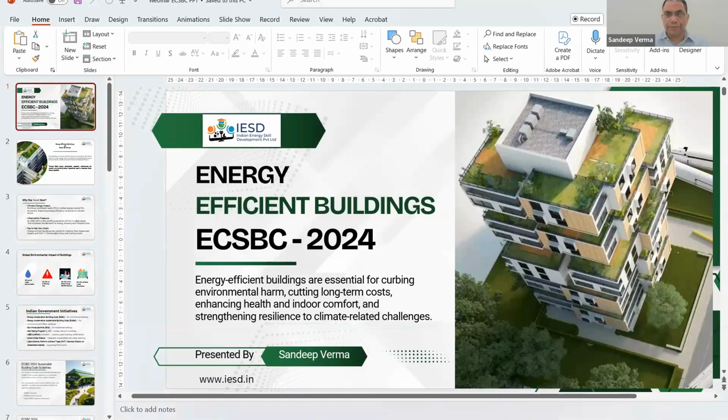So today we'll be briefly talking about Energy Conservation and Sustainable Building Code 2024. This topic is primarily focused on new buildings, which is coming for office spaces and for commercial usage. So first we have to understand what exactly is different in this code vis-a-vis the earlier version of Energy Conservation Building Code, be it 2007 or 2017.

So we used to categorize buildings in two segments. One segment was energy efficient building, another segment was green buildings. So at one side, we were talking about energy efficiency when it was coming down to energy efficient buildings. And on the other hand, we were talking about sustainable development through proper utilization of natural resources and local ecological systems. That was called green buildings. We had statutory guidelines for energy efficient building in the form of ECBC, but we were not having as such a statutory guideline for green building, though rating systems like LEED or GRIHA were present as a voluntary mechanism.

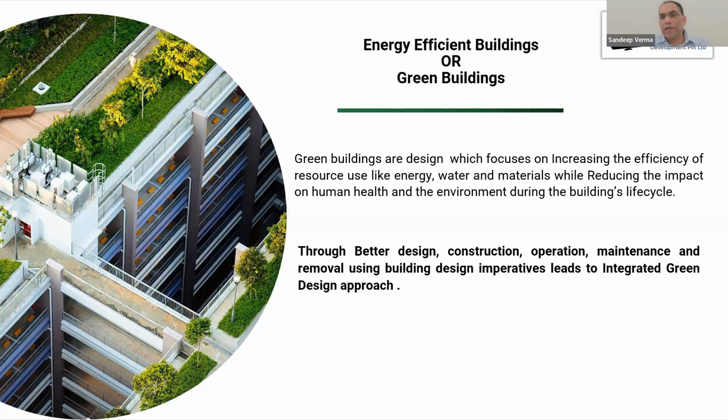So going forward, why do we need this now? That is the very pertinent question - why are we focusing on sustainability as well under statutory requirement beyond energy, because it is observed that 40% of global greenhouse gas emission is attributable to the building sector. So it is a very large chunk.

And then again, there is a huge shift as far as population is concerned. More and more population is moving towards urban areas from rural areas, and it is expected that by 2050, roughly 68% of the world population will be living in urban areas only. So it will put pressures. Obviously, all these people will be working and they will be using commercial spaces, and obviously they will be having residential needs also.

And then we have made a commitment at a global forum, mainly the Paris Agreement. Everybody has heard about it. So we have made a net zero commitment by 2070. So in order to meet that net zero commitment, and in order to ensure sustainable development, we have to adopt these kinds of practices in a very thorough manner so that we can mitigate our carbon footprints.

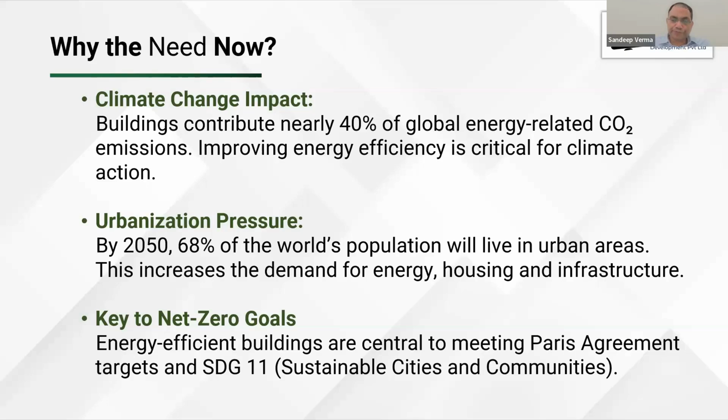So these are basically the global environmental impacts of buildings. Buildings basically consume roughly 20% of water consumption. They consume roughly 40% of energy use. Again, roughly 40% of greenhouse gas emissions, and around 30 to 40% of solid waste generation.

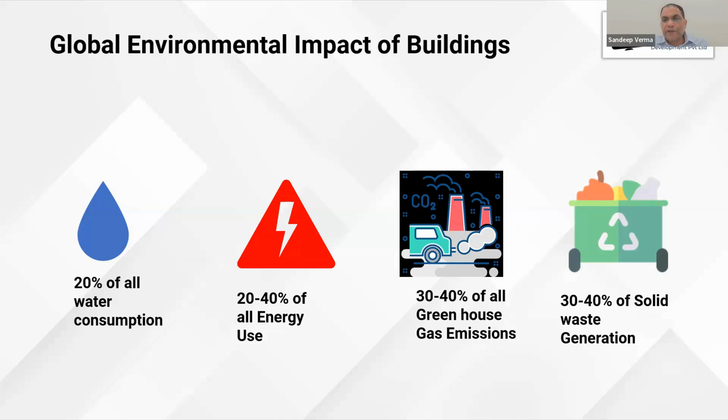So you can see that waste generation is another big factor which has to be considered when we are going forward with this code.

These are different initiatives which have been taken by the Indian government. The genesis lies with the Energy Conservation Act, which was constituted in 2001. Under that Energy Conservation Act, or EC Act 2001, different legislations have been formed, different guidelines have been framed to ensure proper efficiency along with occupant comfort.

These codes are namely the Energy Conservation Building Code, then the Energy Conservation and Sustainable Building Code. And then we have Eco-Niwas Samhita also, that is primarily meant for residential buildings. It was introduced in 2018, and subsequently some chapters were added in 2021. And now it has been further enhanced for higher level of compliance, and ENS 2024 is also available.

Though it is not statutory as of now, in the near future it will again be statutory for different residential projects, especially large scale projects like PM Awas Yojana, or even in tier 2 and tier 3 cities where a lot of residential complexes and row houses are coming. So in order to regularize those houses in terms of sustainability and energy consumption, ENS will be instrumental. So maybe in subsequent webinars we'll try to cover ENS also.

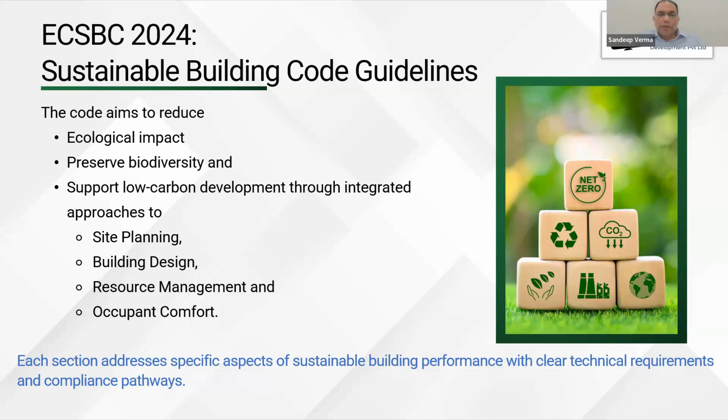For that purpose, we need to integrate site planning in the building design. Building design per se has to be done in such a manner that it provides relevant comfort to the occupants, along with proper resource management like water, and waste generation and all that. Most importantly, occupant comfort - whatever we are doing for a particular building, it cannot be at the cost of occupant comfort. There has to be optimal occupant comfort, not limited to thermal comfort. It can be other types of comfort also, which is required by the occupant. That has to be ensured.

So basically, this code has been bifurcated into primarily 8 modules. Earlier in ECBC, we had 4 modules, and now we have added 4 additional modules of sustainability.

So the first such module is sustainable sites and planning. This is basically focused on topsoil preservation, which is fertile soil. Haphazard construction is causing damage to this fertile soil, and we are not able to reutilize it when we want to develop greenery. It has been specified that topsoil has to be present to the depth of 150 to 200 mm, that is 15 to 20 centimeter from the top. That is the main fertile soil that has to be preserved, and that can be used on site, preferably, for developing greenery.

And in case of exigencies, we may think of using it for offsite greenery development, green belt development also.

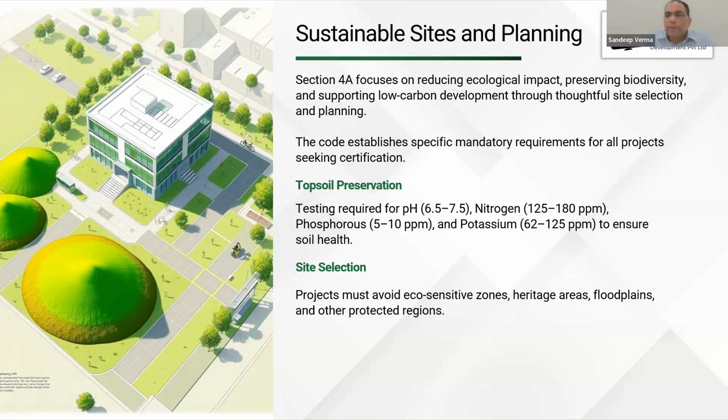Then site selection. Here we are saying that we cannot develop any project which is in contrast with the local geographical conditions. So if the project is being implemented in any kind of eco-sensitive zone, heritage areas, flood prone areas, or any other kind of protected regions, that site selection must follow this. Preferably, it should be avoided, and if there is no option and it has to be done, then the necessary statutory guidelines have to be followed, and the impact to these areas should be minimal to the extent feasible.

Going beyond, sustainable sites and planning is not only limited to topsoil preservation and building sites. It also talks about accessibility, and accessibility for whom? Accessibility for differently abled persons, maybe kids and senior citizens. So buildings should not be designed in a manner that it is only comfortably accessible to the general public, but it should also take care of access - not only access, but toilet requirements, parking requirements are concerned. All these things have to be considered while developing a building, and appropriate signages must be provided, appropriate allocation has to be done, so that any differently abled person and senior citizens can easily access all these facilities.

And then most importantly, we are also talking about transport access. What happens is, at a lot of places we are missing last mile connectivity, and that leads to commuting by car or maybe by bike. So though we have a good public transportation system, we are missing on last mile connectivity. So that last mile connectivity is being integrated into this building design.

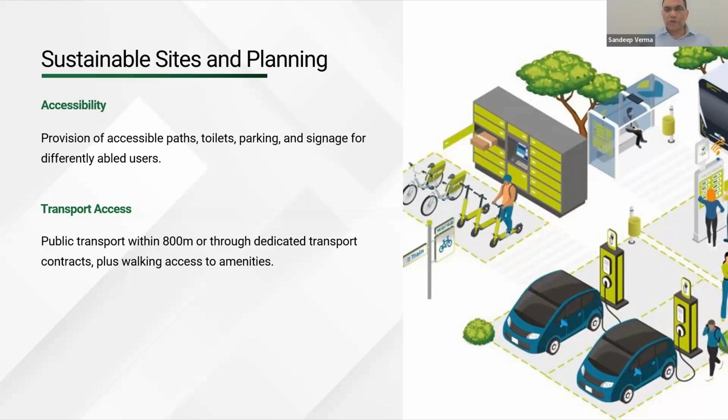Within a radius of 800 meters, there has to be public transport available, and in case it is not available, then in-house transport arrangement has to be done to the nearest public transportation system. So all these guidelines have been specified, and that's why, as I was saying, it is also part of the smart cities mission, that we have proper last mile connectivity. So they are basically in cohesion with each other.

Then this next module was already there in ECBC, that is building envelope requirement, but we have slightly enhanced it in this 2024 version when we came up with ECSBC. It obviously talks about opaque construction. We are talking about different ISOs which have to be followed in verifying the parameters, and the different testing methods which have to be followed. Opaque construction basically means we are talking about exterior walls, and we are talking about roof and all.

And we'll not be talking about interior floors or ground floor, and we'll also not be talking about internal walls. So it is only limited to external walls and external roof. Then similarly for fenestration also, we have certain parameters, and the guidelines have been specified, different ISOs have been specified, how do we check it and all, so that whatever is being claimed, the same specification is present during application.

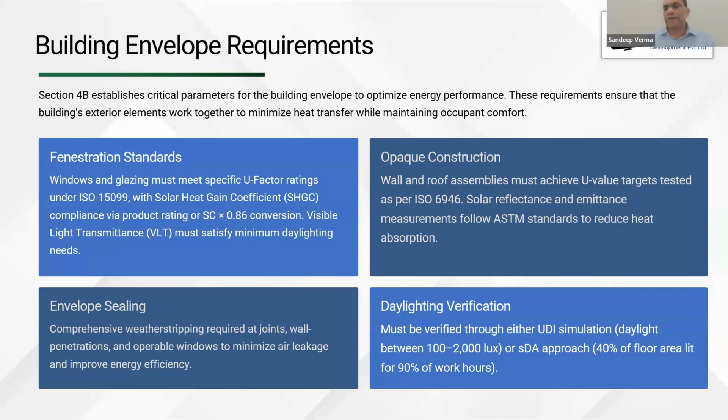And we can verify this availability through either computer software or computer simulation method, and we also have a manual simulation method which can be adopted.

Moving on further, similar to what I was talking about with building envelope, here also the module remains the same, the chapter name remains the same, but we have enhanced it further. The requirements include ventilation requirements, commissioning and balancing of your comfort system, providing proper insulation to ducts, plenum and pipelines, placement of equipment primarily condensers, and usage of economizers.

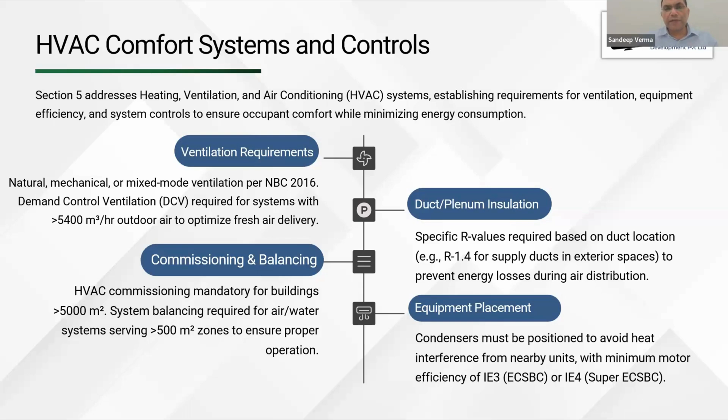As far as efficiency level is concerned for chillers or air conditioning equipment, we have introduced certain additional parameters so that we can have a better understanding and ensure better performance while the building is in operation. Simply measuring coefficient of performance (COP) or energy efficiency ratios, which are meant for 100% loading, it is observed that they are not representing the correct picture. So all these things have been improved from the previous version, and this is much more comprehensive now. And obviously, different kinds of control systems as per developing technology have been specified in this chapter for regulating the comfort system.

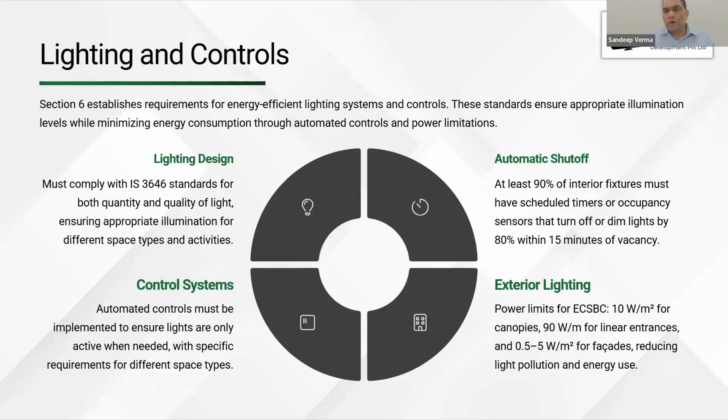Then, as far as lighting and controls are concerned, beyond lighting power density—that is how much light you can utilize per square meter of building carpet area—we are also talking about lighting quality, that is color temperature and color rendering index, which is the capability to recreate natural color in artificial lighting. Similar to earlier versions, we have a different compliance method and different LPDs have been assigned, and we have specified IS codes also to ensure proper quality and quantity in the working environment. All these things have to be properly controlled depending upon the type of space and the level of occupancy. So this has been specified.

Electrical and renewables talks about the efficiency level of transformers, efficiency level of UPS, power metering, power distribution, what kind of losses we can have, voltage regulation, and harmonic distortion, whether it's voltage harmonic distortion or current harmonic distortion. And lastly, renewable energy requirements are also integrated in this chapter.

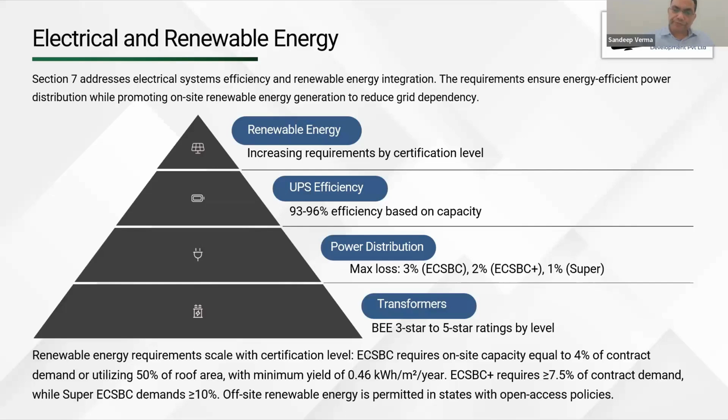Again, after site planning, we talked about the modules which were already present in ECBC, though they have been enhanced, but still they were present. The person who has covered ECBC might have a fair idea about these previous four modules. But as far as the sustainability part is concerned, after site planning and site selection...

We have water management and control. This is again a new module coming into the picture, and in this module we are talking about water quality—what kind of water quality is being utilized, primarily based on TDS level and all. The water source has to be properly documented and has to be a reliable source. And then we know a lot of efficient fixtures are available, sensor-based fixtures are available, regulated flow, or we have air-water mixtures also.

Recently I was traveling in a flight, and I observed they have changed the ratio of air to water in a particular tap. So air is also getting mixed with water so that we can achieve the desired effect with the least amount of water while cleaning after washing your hands. Similarly, for flush also, they are being made more and more efficient—we have a small flush and a full flush, depending upon the usage.

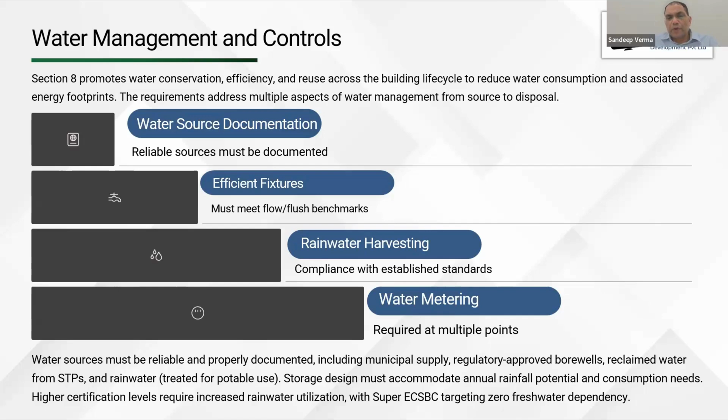So we know that rainwater harvesting is very prominent. I've seen this in Gujarat personally, where they store rainwater and then utilize it for drinking purposes after proper processing. So rainwater can be treated for potable water, but you cannot fulfill the 100% requirement that way. Obviously you require some other source, which we have already talked about earlier, and we need to have reclaimed water also, through STPs, that is through reprocessing of gray and black water.

Then, again, this is one more module, the third module of sustainability, that is waste management. And waste management is not only limited to operational waste, we are also talking about construction waste. So we are saying that both in the construction phase and post-construction phase, waste has to be properly managed. It must be properly segregated into hazardous and non-hazardous waste, and there has to be a designated storage area.

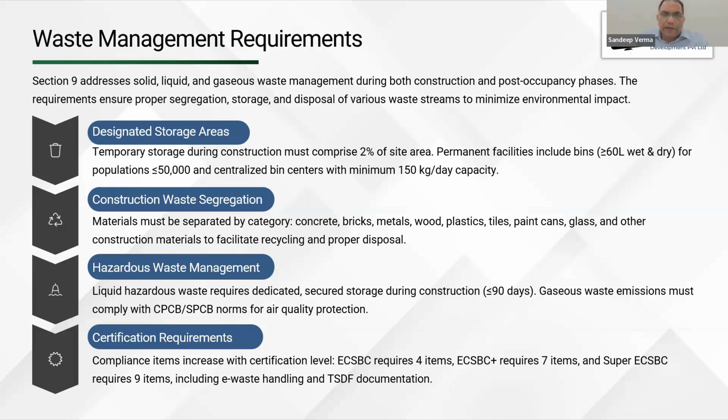Depending upon the type of waste and type of processing available on site or off site, depending upon the size of the building, we can go for recycling of this waste. If it is organic waste, we can recycle at site, or hand it over to a municipality. Hazardous waste inevitably has to be handed over to the municipality or a designated collection agency. Construction-based waste has to be completely cleared, segregated and removed before occupancy starts.

We also have, it is not exactly a module, it is an appendix which has been given. It is one of the requirements that we identify what kind of embodied carbon is present in the material which is being used as a structural element. So this is basically based on the cradle to gate concept.

Let's take an example, briefly: let's say it is cement. We are extracting raw material for cement, and then we are transporting that raw material to the cement factories, and then reprocessing that raw material into the finished product, that is the cement, which is utilized in construction. So cradle is in the mining, from the mining, and gate means basically when it is coming out of the cement manufacturer's factory. So this is called the cradle to gate concept.

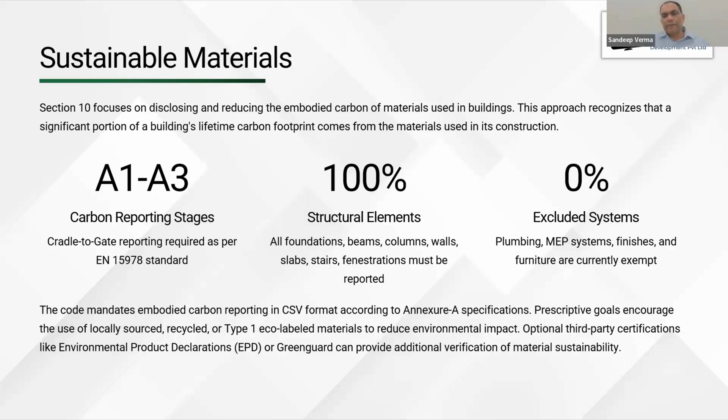So different stages, these are called different stages, A1 to A3. A1 is your mining stage, A2 is transportation, and A3 is finishing of that raw material. So at all these stages, carbon reporting takes place, and based on that carbon reporting, embodied carbon can be identified. All these guidelines have been specified in this code.

So this is basically the fourth module, sustainable material. I just touch upon that, it is a requirement under the code, but it is not a full-fledged module per se. It is only a table, and based on that table and the data available from cement manufacturers, or steel manufacturers, or brick manufacturers and so on, we need to have that data. We need to collate that data, and we can obtain it in various ways - either we can calculate it, estimate it, or get it from the supplier. Based on that, we can declare the embodied carbon of the product, the material being used for construction purposes.

And then the last chapter of the sustainability module talks about indoor environmental quality, that is IEQ. It talks about indoor air quality, what kind of particulate matter can be present, how do we control CO2 levels, and though it is briefly covered in the ventilation part, here we have given certain additional requirements. It also talks about VOC control, volatile organic compounds.

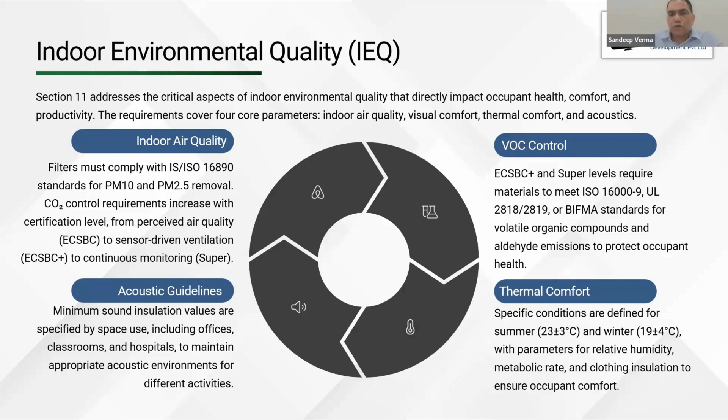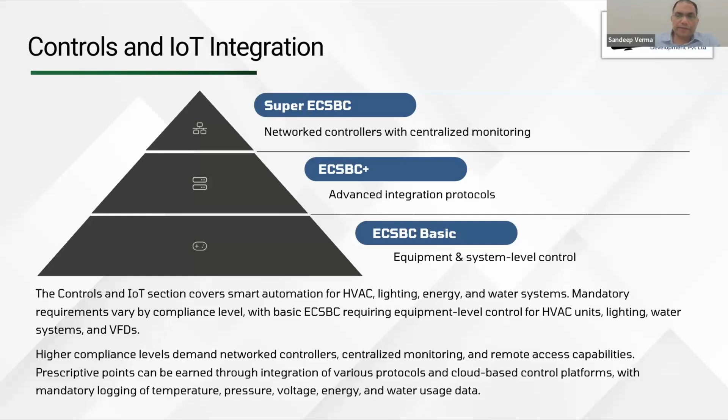Similar to sustainable materials, controls and IoT integration are now separate modules. The ECSBC standard basically requires equipment and system level control. For higher compliance levels, we can have advanced integration protocols or network controllers with centralized monitoring, like building management systems. Now with IoT technology, controlling different parameters becomes much easier compared to earlier days.

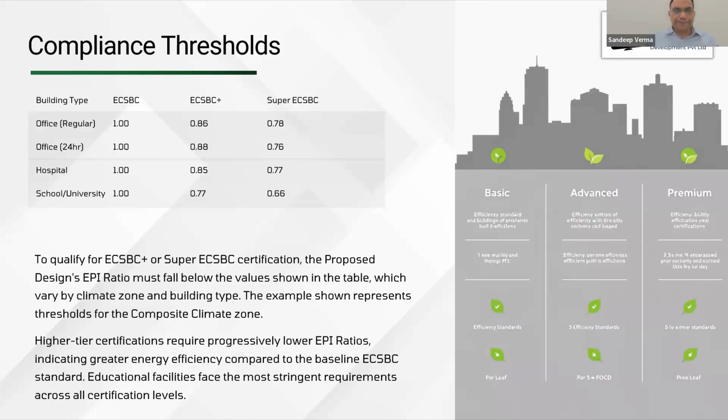So what are the different benefits along with the incremental cost we incur? Trust me, we only incur an incremental cost of 2 to 3%. Why is that so? Though we are investing in making a cool roof, investing in insulation, and going for higher efficiency equipment and such.

But somewhere we are saving—you can reduce your cooling system size by 25 to 35%, which itself is a huge saving. You can reduce the size of your transformer, again a huge saving. You can reduce your wire sizing. All these things happen because overall energy consumption goes down, and your overall energy requirement goes down through these interventions. So your net extra outflow is not more than 2 to 3% of your initial capital cost.

Further, when the building is in operation, water consumption goes down by 30 to 40%, greenhouse gas emissions go down by 30 to 40%, operational waste generation goes down by almost 50%, and energy consumption goes down between 25 to 50% depending on the level of compliance. Operating cost goes down by 8 to 9%. Even without considering non-tangible benefits like waste or water savings, the payback period comes out to 2 to 3 years, not more.

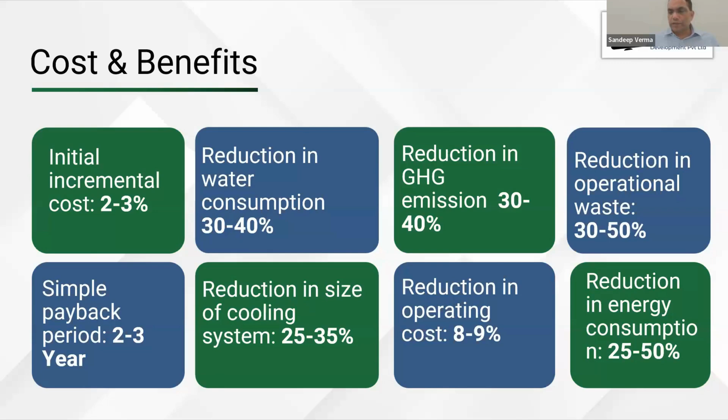So why then, when it is a win-win scenario, are we not following it? These are the different barriers and challenges we face, which we have to overcome to wholeheartedly implement these initiatives. First is obviously a high upfront cost perception. Though it's only 2 to 3%, people think it's like 20 to 30% additional cost, which becomes very significant when talking about 20 to 30% increase in capex.

There's a lack of awareness and lack of trained professionals who can convince the developer that going for ECSBC is basically a beneficial scenario. As far as enforcement is concerned, there are some enforcement issues. Since the policies are relatively new and we don't have enough trained professionals, compliance becomes an issue, and without proper trained professionals we cannot fully enforce that policy.

If we start unilaterally enforcing the policy, it becomes an issue. So in order to avoid that, we need more and more trained professionals. For new buildings it's okay, but for existing buildings there are certain technical challenges we are not able to overcome. Once we're able to overcome them, we can ensure compliance in existing buildings also.

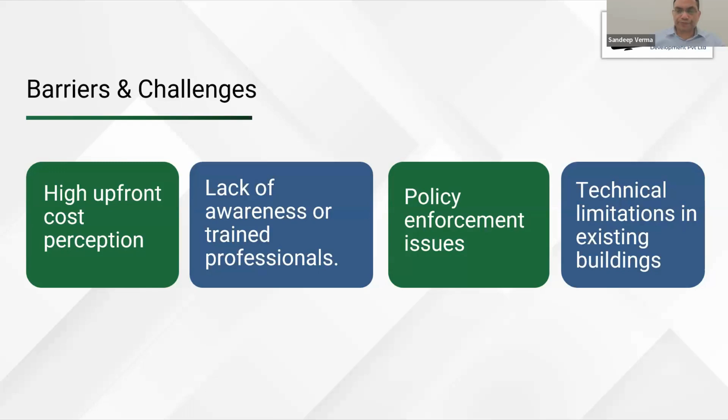So why are we launching this program? Obviously we require more trained professionals, and this is basically the latest version, which talks about additional elements of sustainability. So in order to make you well versed with these additional chapters, which remain mostly alien to normal professionals, one person knows only half the area and another knows the other half, and there's a lack of integration missing. So a person must be competent not only in energy efficiency but also competent enough in sustainability.

It is envisaged that in the next 10 years around 40% new commercial spaces are to be added, so we'll be having a huge requirement. I was reading an article a few days back that says in another 25 years we'll be generating roughly 30 million jobs for green professionals, and obviously ECSBC experts will be one of them.

Apart from this, the Bureau of Energy Efficiency is going to launch a certification program for certified energy auditor building. It has been under deliberation, they've released the public notification, and very soon, maybe by next year, we'll have this certification program similar to the normal certified energy auditor or certified energy manager. We'll be having building experts also, and to become a building expert you need to have this knowledge. If you have this knowledge, you'll get first mover advantage.